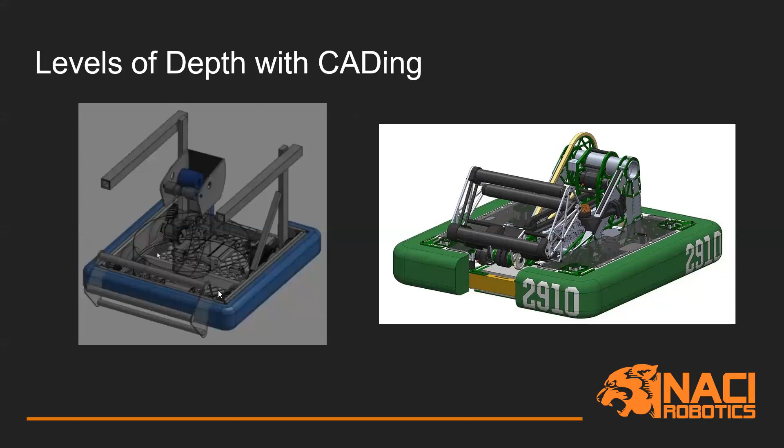I think the three main topics we'll aim to cover today are geometric sketching and Crayola CAD. Crayola CAD, going back quickly, is very similar to this left-hand image, where you place mechanisms to specific areas to get a feel for how the robot is going to be built. Geometric sketching is something every team should be able to do, because with this year's game you're able to take advantage of CADing software without having to do everything in 3D.

We'll also be able to create a new part that we want to design, and then build an assembly from this. So we'll try to get through as much as we can and go from there. Does anyone have any questions so far?

Cool, I guess we'll continue.

So I guess the first step is getting to Onshape. Just Google Onshape and you'll come to this window. One of the biggest benefits to Onshape is it's free for students to get access to all this stuff, so they'll just go through this portal which says create a student account. And if they use their school email address, they'll get a bunch of the features for free.

With mentors, it depends, because I do believe as an educator you will be able to get a lot of these similar perks. How you go about signing up to that, we'll have to see.

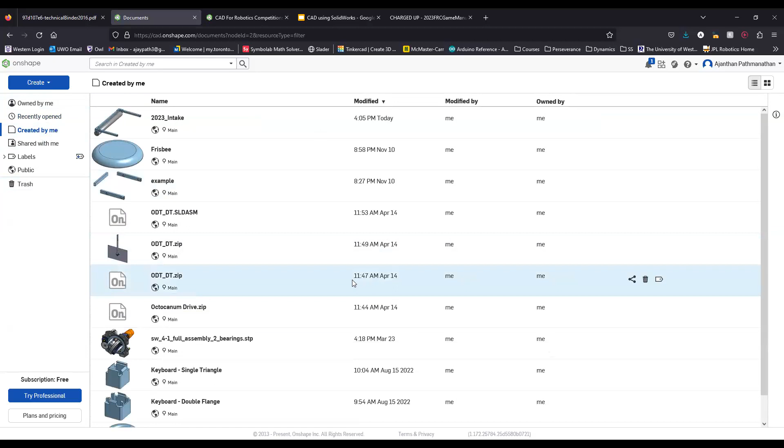We have this dropdown called owned by me, and we can open up recently opened files. We can see all the recent files we've been working on, stuff created by me, meaning the files your team creates yourselves, and then shared with me.

When it comes to building with teams, the shared with me function is really great because it will allow a lot of different students to work through their own projects and collaborate together with these mechanisms. You also have labels, which is a nice ability to organize your stuff.

Going back to this main page, this is just a getting started page. We'll review some resources at the end, but one of the biggest things is this: take a self-paced course. For those of you who really want to get into learning Onshape, this is a really good way to learn the fundamentals we'll be covering today, at your own pace.

I really recommend anyone trying to learn this to go through it. They have a couple of modules that you'll go through.

Another good one is the CAD for robotic competitions course. This is specifically tailored to designing robots in CAD. We can see some of the stuff they're covering: drivetrain, custom components, collaboration for teams, manufacturing, and communicating your design. This is a lot of the stuff you'll be tackling within a first build season.

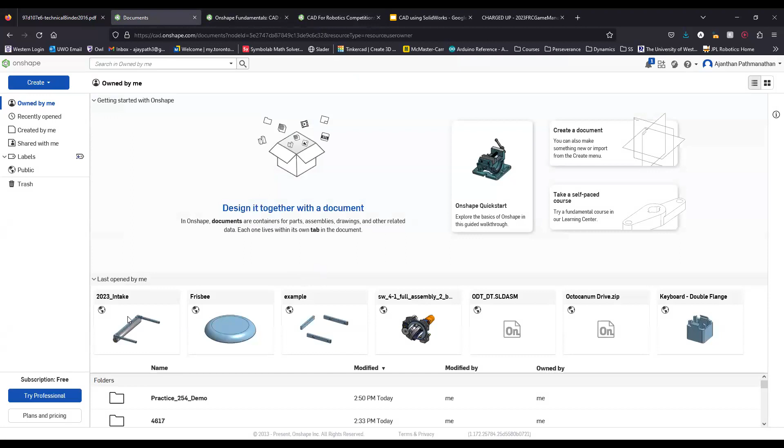Now that we have that covered, lastly, open, similar to your Google Drive, you'll have your latest viewed parts here. Next we have folders, so you can have a folder system for all your parts, which is nice for organizing.

Let's take a look at this practice demo, for example. We see one mechanism, and the way I like to teach is through examples. If we open up this part, a CAD can basically be broken down into two components. This is technically an overall assembly.

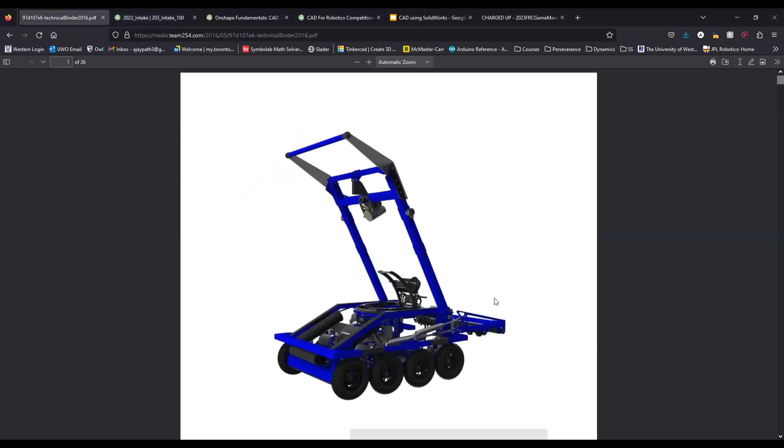This model is modeled after Dropshot, 254's robot from 2016. The goal is to build the intake, so we want to copy their intake and use it as a learning lesson for us to be able to design parts going forward.

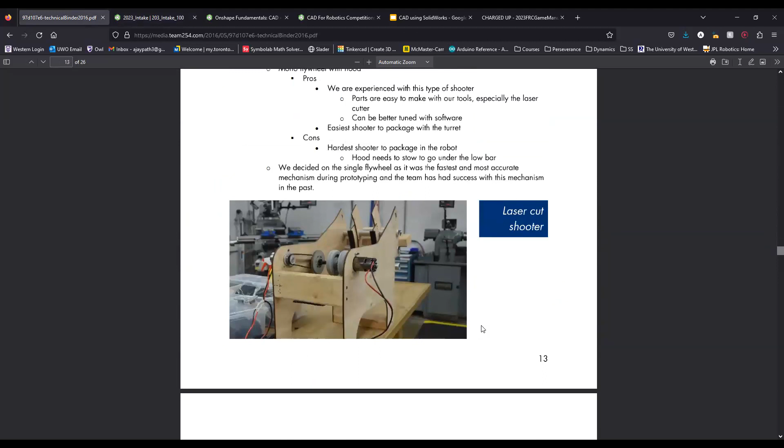It's a very simple mechanism that I think will really teach you a lot of the basics as you go through it. Here we can see the mechanism is essentially three 1x1 pieces of tubing with a roller down here for intaking their ball, since in Stronghold it was a 10-inch compressible ball. They also have this back roller in order to cycle that into their shooter, and a gearbox down here.

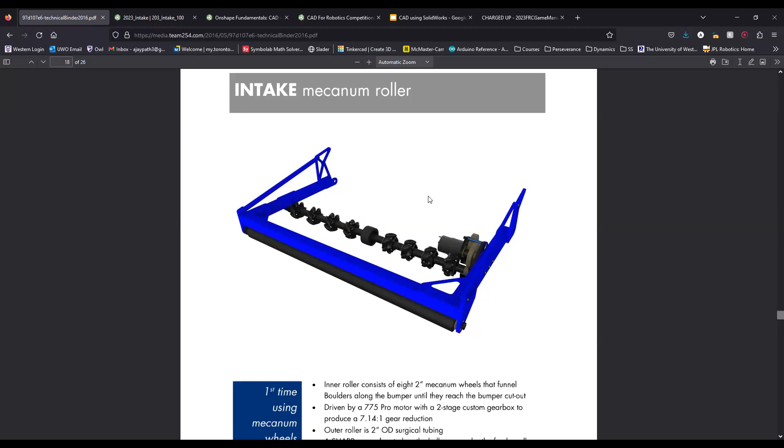For our sake, going back to this mechanism, we won't have enough time to go through all of this stuff, so I think we'll focus mainly on creating this frame piece, these 1x1 pieces of extrusion. We'll create some gussets in order to rivet or connect this all together. We can also create a roller, and I'll show you, if there's time, how to import and get some parts.

So yeah, before we start, are there any questions?

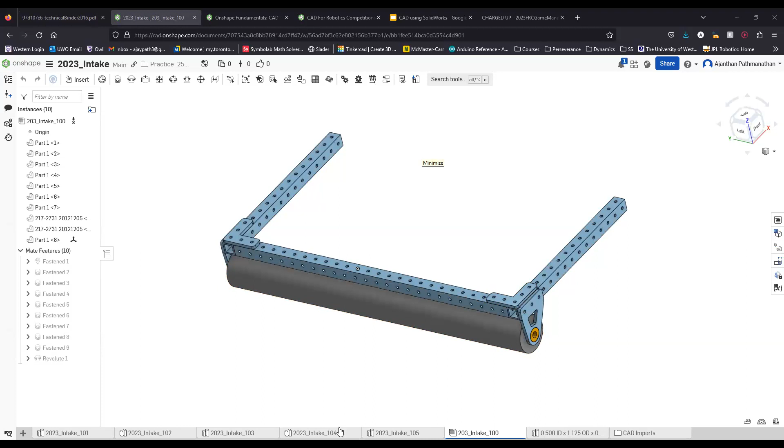So if we go back to Onshape, I'll start from the very beginning. Let's say we wanted to create this brand new. We'll go to open a folder, and then we'll say November 14th demo. So this is essentially a folder that will hold all of the files.

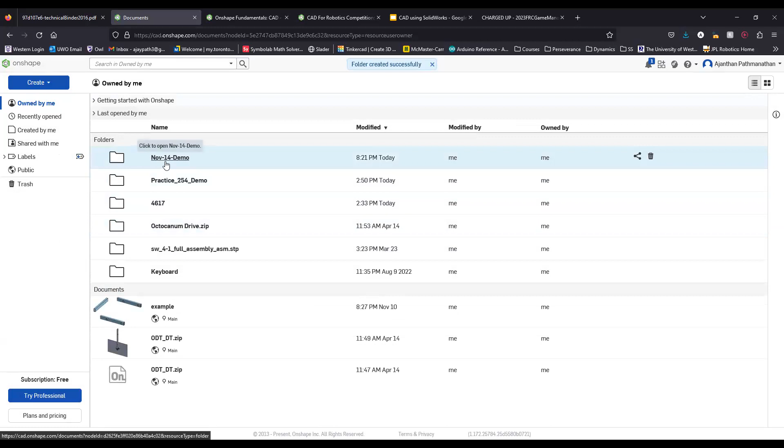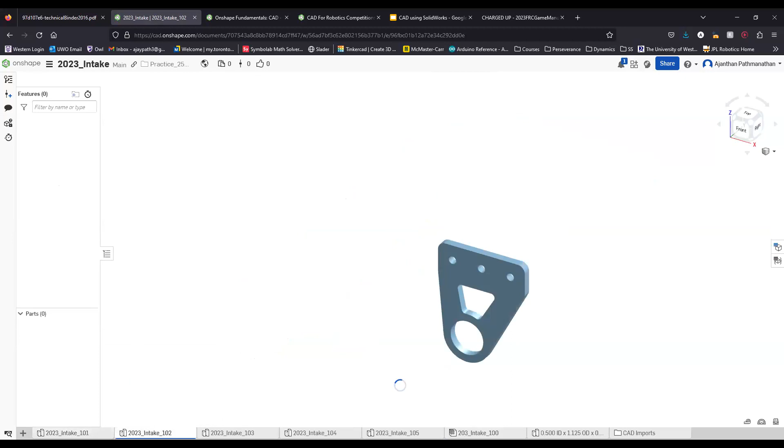The way that you can use Onshape is very particular to your own needs. For example, if we go back to this file, you can see how this mechanism is technically going to be a subassembly. So what I personally like to do is treat this mechanism as your subassembly, and down at the bottom here you should be able to see the various parts that we're going to be building. These are your part windows, and you can see each individual part that we've designed. All together, we can combine these individual parts into an assembly, and that's what this final product will look like. So this you can treat as a subassembly.

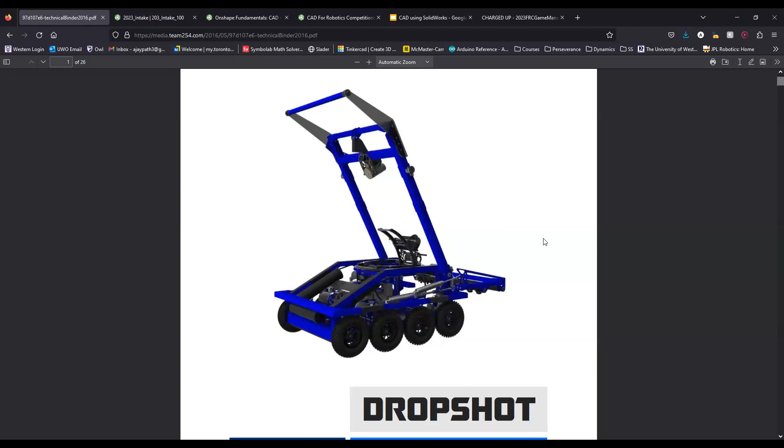Going back to our example, if we scroll up to the overall picture of the robot, one way that would be easy to organize this robot would be: your drivetrain is one subassembly, your intake would be a second subassembly, your climbing mechanism would be a third, and then your shooter would be a fourth. So if you were to break up your robot into that sense, you could have four different subassembly teams. They all collaborate, and you as a mentor would be able to look over all this collaboration and then help the students bring those four components together and design an overall robot using each subsystem.

Okay, so the first thing we'll do is we'll create a new document. And so this will be our intake subassembly.

When it comes to naming conventions, a lot of teams like to do various different things. For us, we mainly like to include the year that we're designing this part, the subassembly it belongs to, and then the part number. That part numbering system, 100 will essentially be the base of it, and then you increase. So 101 will be one channel, 102 will be the length channel, 103 can be a gusset.

So it kind of follows that naming convention, but everyone can do parts differently. At the bottom here, we can see there's a part studio and an assembly tab. We'll essentially be designing individual part studios, and then we can take these parts into our assembly and import them and fix this all together.

So before we start that, let's take a look at geometric sketching, which I mentioned before. As a quick rundown, this may look very daunting to have a lot of these tabs open, and you may be wondering what all of this means. When it comes to designing parts, a lot of this stuff you probably won't use. There are core components, which we'll be covering today, which will very much help you in designing essentially any robot that you wanted to. A lot of this other stuff is essentially stuff that you can learn on your own. So we'll be mainly focusing on the core components.

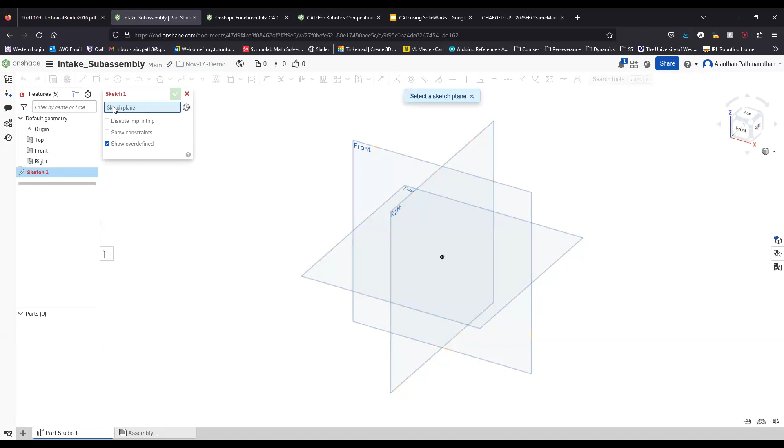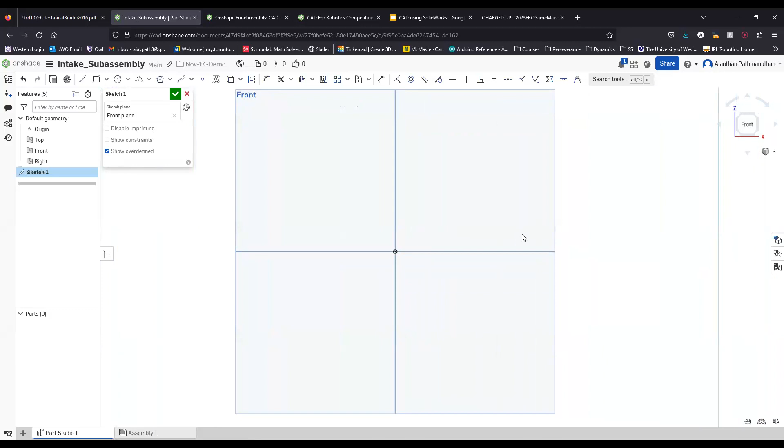It's asking you for your sketch plane, and we're going to design on the front plane. This little cube in the corner will allow you to shift the orientation of the workspace itself. If we go to front, we'll be able to look at the front view. You can also click down the scroll wheel on your mouse and drag the workspace left and right, up and down. Then if you use your right mouse click and hold it down, you'll be able to orient it as well.

So to start with sketching, one thing I'll quickly show you is geometric sketching and the importance of using this first. Let's say, for example, if we look at this year's past game, let's say we wanted to score the cone. So with the cone, let me explain. This is a line tool.

We can use the line tool to, as it says, create lines. With each line, we can click and draw in this workspace and kind of go through and click and drag where this is going to be.

So we have a question: how do you use the wiring custom feature? I was wondering if you could elaborate on that point. Do you mean for electrical stuff, or do you mean a tool in Onshape?

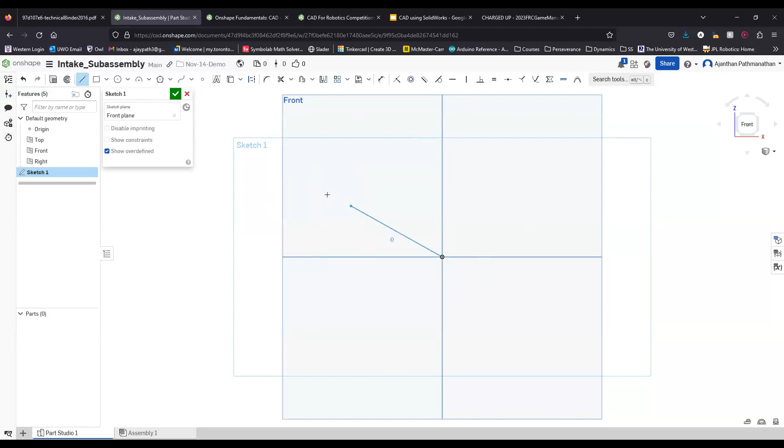As we wait for that response, essentially you can think of this as a drawing board. If you have a line, you can essentially draw this in any space. When we look at the first field for scoring a cone, we can think of the two poles that are sticking out. As you can see, these are blue, meaning you can shift it around and extend it. Basically, this means it's not defined.

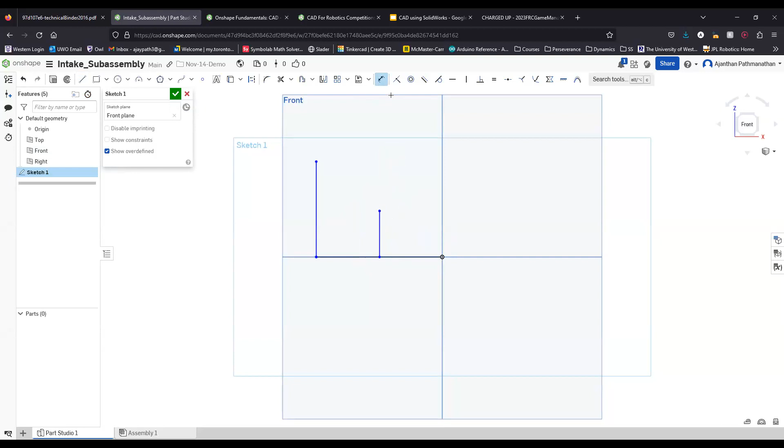In order to define things, we need dimensions. If we go up here, we can see the dimensions tool, it looks like a ruler. By clicking the dimensions, we can click on the line itself, and then we can get a distance, and this is in inches. We can assign a distance that this line will elongate to.

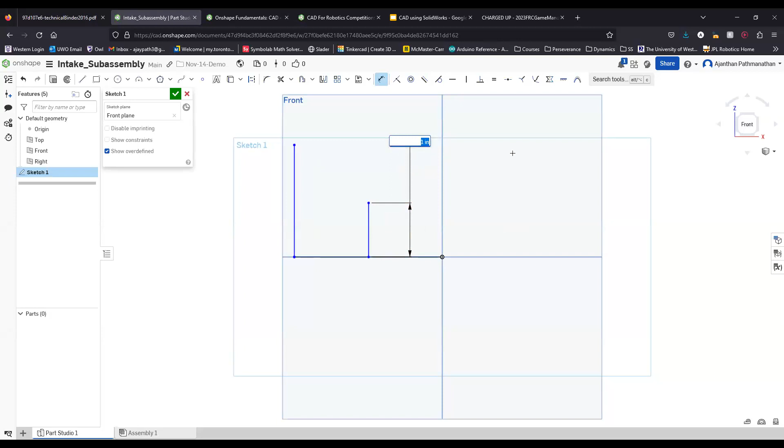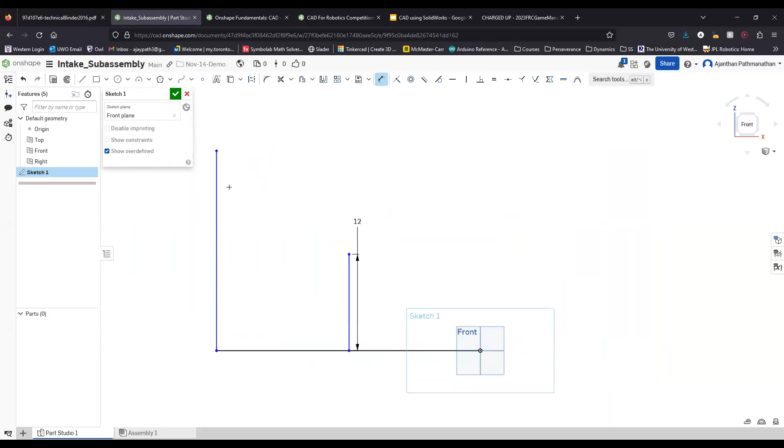So right now I can say it's a 1-inch line, and it will edit there. Then I can come back and double click in and adjust that to a 3-inch line, and it kind of adjusts its reference. In terms of the first field, I believe roughly this was 1 foot, and your larger pole was 2 feet. So now we can assign lengths to each line.

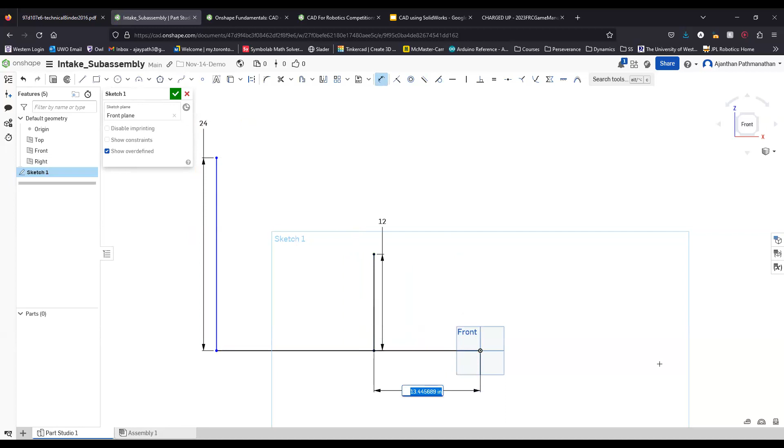But now the question is, how do we define this distance? We can go back in and click our dimension tool. From the origin, we can distance to this line, and then we can edit our distance here. Let's say it is 24 and 40.

So now that our sketch is black, it means that it's fully defined. If I click any piece, I won't be able to move it because it's fully defined and constrained. This is essentially a sketch of the field. Hopefully you guys can visualize the poles that are standing there. When it comes to geometric sketching, it really helps us understand the capabilities of a robot.

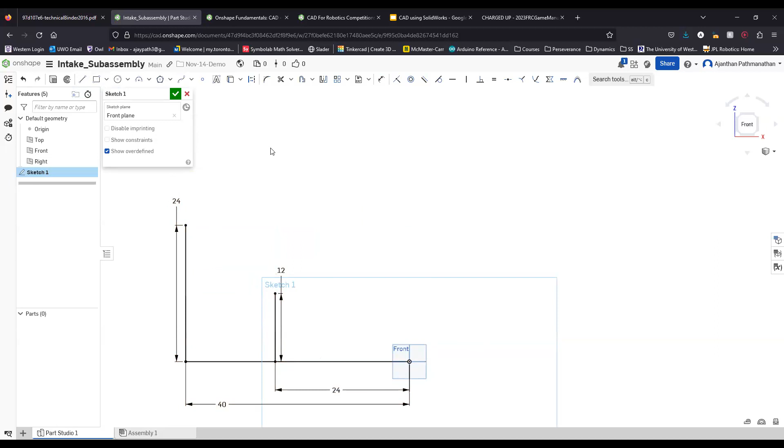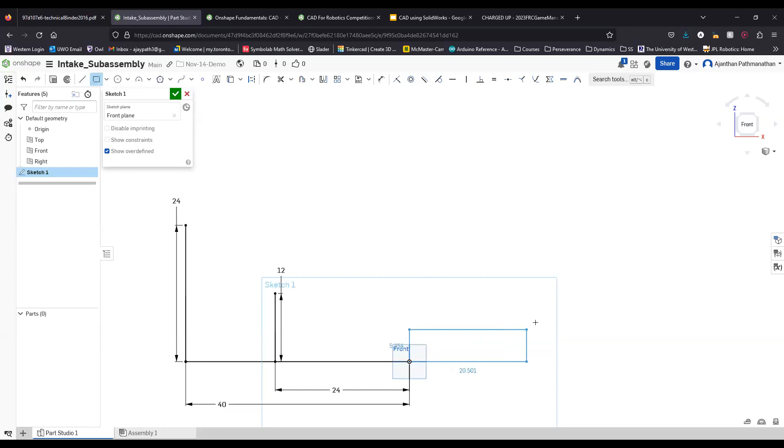To cover this very quickly, if we use this corner rectangle feature, and click that little arrow, we can get different types of rectangles. For our need, we're going to use a corner rectangle, which means we click on a point for the corner, and drag out to essentially any point in space. If we dimension this to be 32 inches in length by roughly 6 inches in height, this is a rough estimate of the kitbot frame.

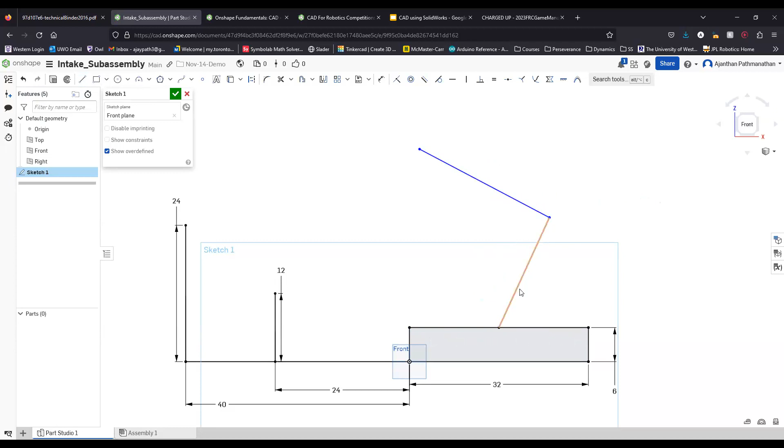Let's say we wanted to make a double jointed arm and place it in the center of our robot. If we see this line here, this little square pops up, and we can drag a line from there to indicate that it's the midpoint. So we can have one arm here and one arm like this. This can essentially act as your arm, a double jointed arm, say you were trying to place a cone onto this back layer.

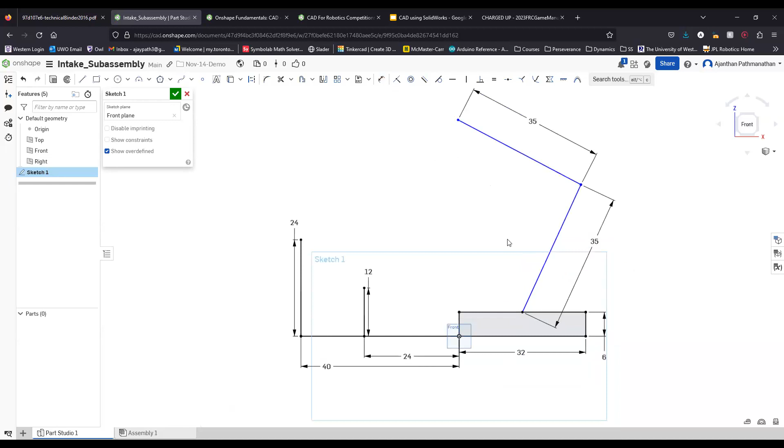So we can quickly dimension that line, and let's say we wanted to make it 35 inches, and then we also wanted to make this one 35 inches. The biggest benefit of being able to do this is you can quickly see if these measurements will be able to reach the point that you're trying to achieve.

This is a really handy skill when you're designing mechanisms at an initial phase. If I wanted to design something like an intake, I'd be able to quickly model the game piece on the ground, compare it to our drivetrain's dimensions, and then see the length of the intake I'm going to need, where to place the rollers, and what type of sweep the intake will have when it goes from its resting position to its down position.

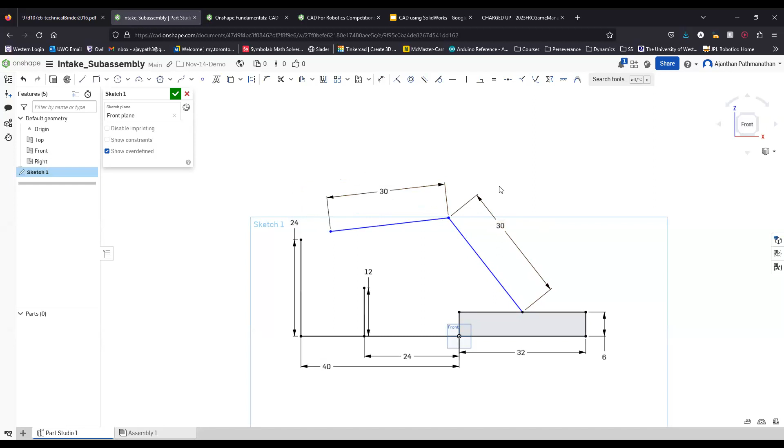As you can see, we can change these different measurements. Let's say we wanted to make this arm as small as possible. If we constrain these to be 30 by 30, we can see will this be able to reach? And we can see it kind of is able to reach when it's fully extended.

One of the things we can do is delete this constraint and move this piece closer. I want to click on this little corner piece, and we want to click this line. Up here we have different constraints, and constraints are really helpful when it comes to sketching because you can assign things like two parts being coincident to each other.

If you have two circles, they can be within each other, which is concentric. You can have two parts that are parallel, tangent, vertical, horizontal. So when we design parts, we'll see this a lot more.

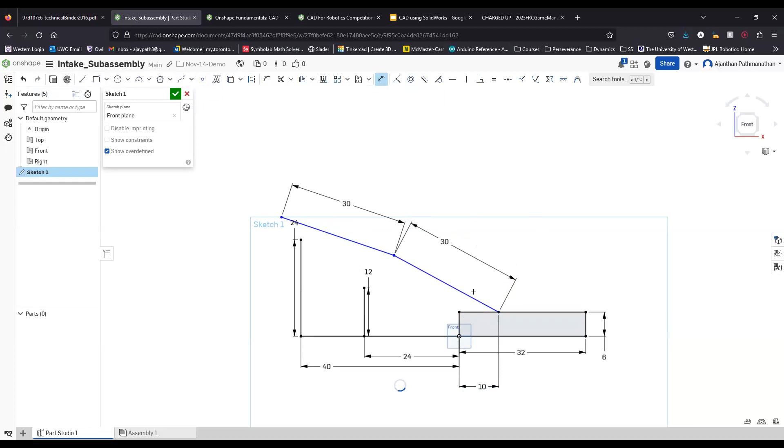For now, we just want to make these two coincident. Then we want to take our dimensioning tool again, and we can dimension it, let's say 10 inches from the front of the robot. Now we can see that it's able to reach.

So this is essentially just a quick overview of geometric sketching. It's a really handy tool that allows you, without having to design every single detail of every single part, to see if your logic will be able to achieve these things. Instead of having to build an entire mechanism and then realize the length was too short and you weren't able to reach your goal, this is a really quick check you can do to make sure everything works properly.

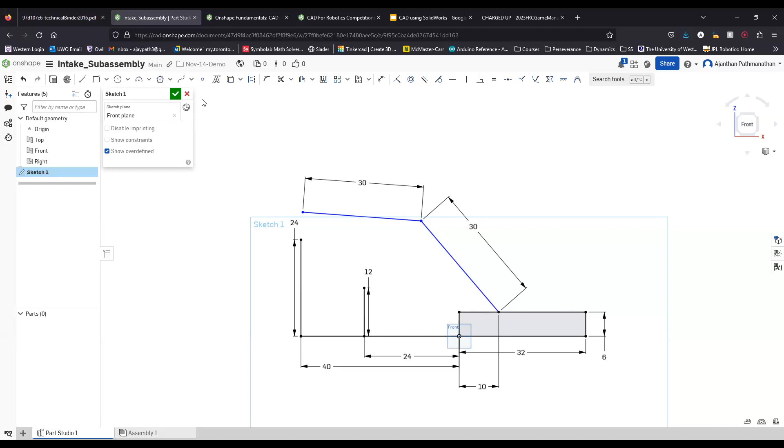So if no one has any questions regarding this part, then we can create our first part. Let's go back, and I'll just open it in a new tab so we can cross-reference this with the part that we want to design.

The first part that we want to design is the center piece of tubing. With this piece of tubing, we'll be able to design this from scratch and then use this as a 1x1 piece of tube.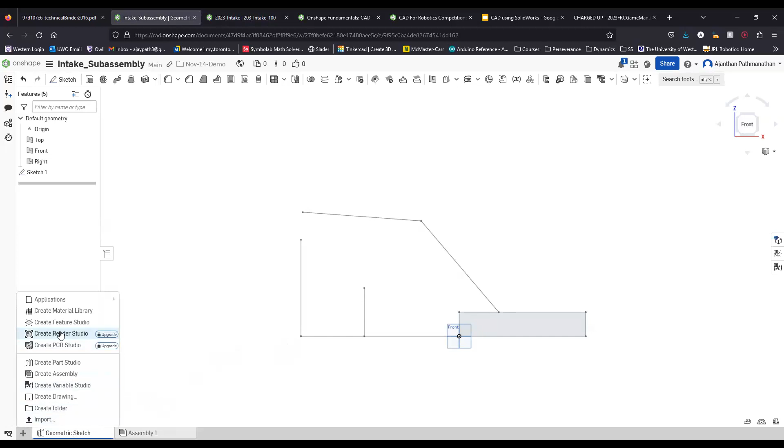If we look down here, we can click on our part studio and then click rename, and we can call this our geometric sketch. From there we can insert a new tab and create a new part studio. This is essentially creating a new part for this subassembly.

Of similar nature, we can click sketch and choose our front plane, then orientate ourselves in order to be on that front plane. Up here we can see our drawing tools, as I like to call this section. You can draw lines, corner line rectangles and squares, circles, arcs, polygons of different sides, and then you can have some text if you wanted to.

So this is a lot of your drawing tools when it comes to designing. Then you have what I like to call features, the main ones being changing lines from a solid line to a construction line. A construction line is just a line you're using for reference, and it doesn't really have any effect on the part. You can have fillets to kind of round edges.

I think someone has a question.

Yeah, it's Peter. Just wondering, I've noticed on some sites like AndyMark and things like that, they actually have CAD files of the part, like if it's a 1x1 piece of aluminum. Can we just bring that in, or do we have to actually draw it physically, like what we're doing right now?

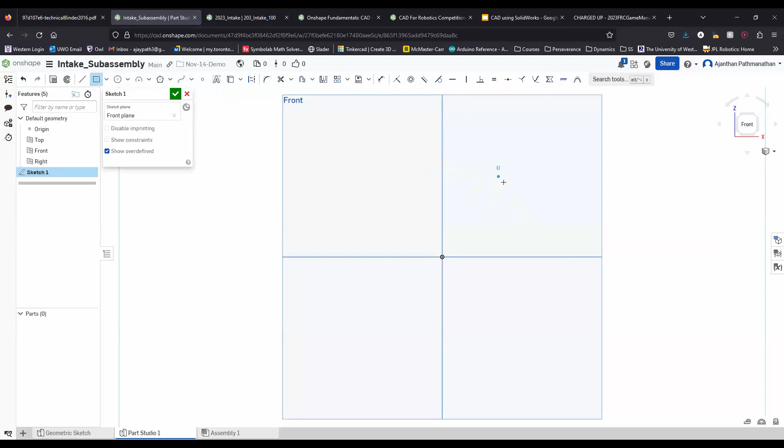Okay, so let's just assume we wanted to design a piece of 1x1 tubing. The first thing we need is a rectangle, so we click this dropdown and select a center point rectangle. If I draw this rectangle, I can draw it anywhere in space, but what if I want to put it at the origin? First I click on the center here, then the origin, then click the coincident constraint, and this will bring the two together.

Next we need to define the length and the width. For a 1x1 piece of tubing, both are 1, so we create a dimension and specify 1 inch. One thing I teach my students a lot is to use as many relations as you can, because relations are much easier to change later than dimensions, since you'll have less to change. For example, if I wanted to dimension the length of this other line, I could also set it to 1. This is one way to get a 1x1 square on your sketch.

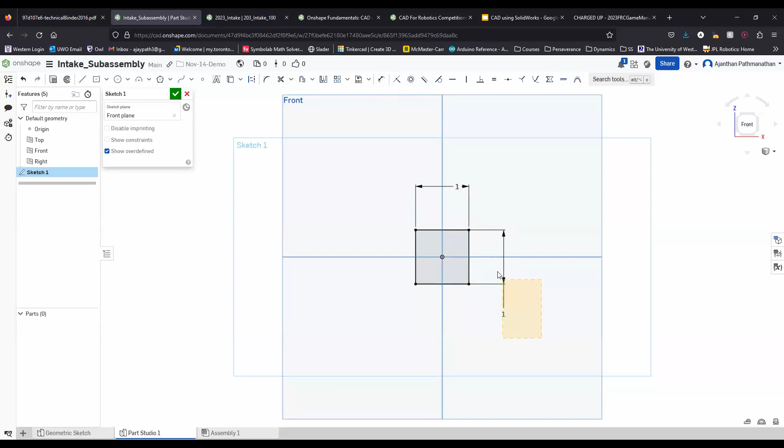The problem is if I wanted to change this to 2 inches, I would also need to come back in and edit this one separately. So instead, what we can do is click this top line and the side line, and find our equal constraint, which as it says in the dropdown, makes them equal length.

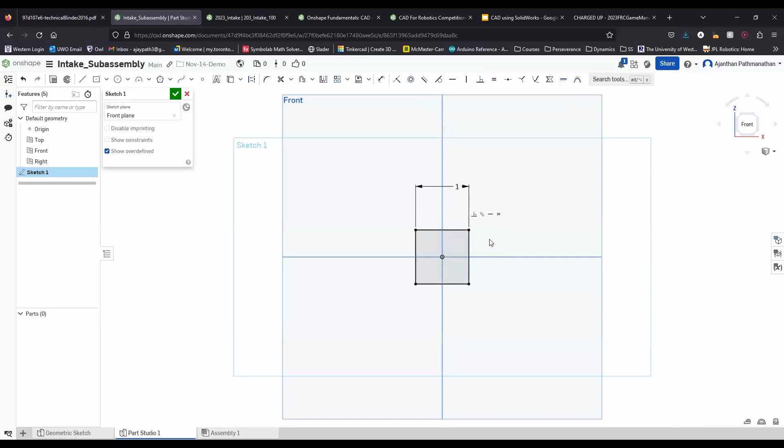Now we can see that's all black and it's fully defined. If I change this to a 2-inch square, then it all moves together. Depending on the purpose, we find that using constraints is a lot easier. I recommend people to play around with them and find out what they like to use as a team.

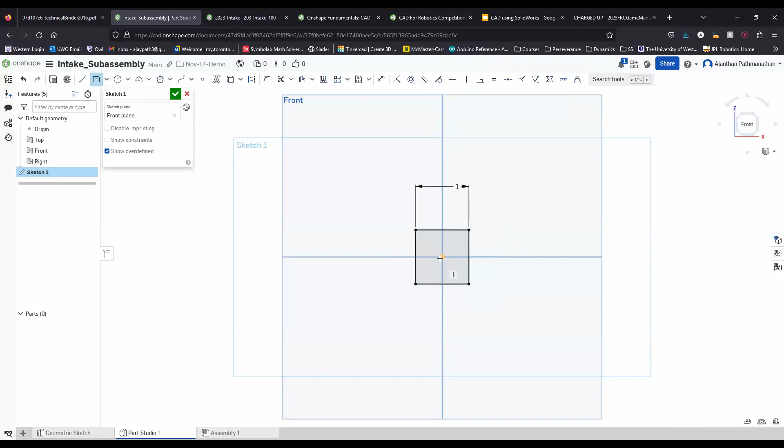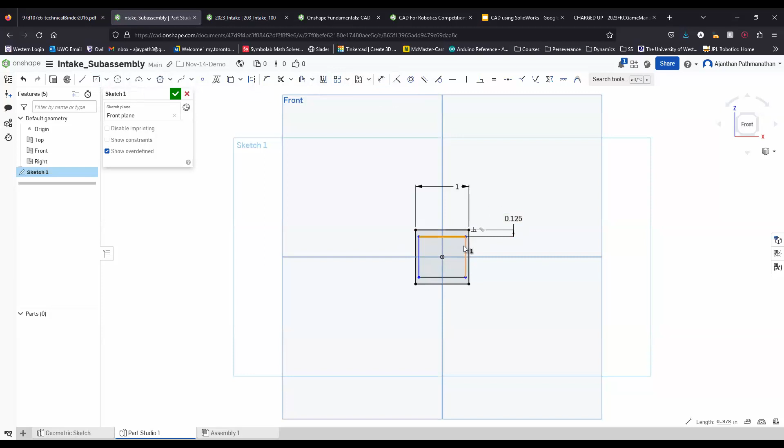So to make our tubing, if I click on the center, we'll draw on the origin as well. This measures the outside 1x1 piece, and then we want to make our inner thickness. If we go back in dimension, we can dimension between these two lines, and let's assume that our thickness is 1/8. Now all that's left is if we click our top and our side line again, we can make them equal, and then we can have our 1/8 piece of tubing.

So now we have a 2D flat sketch, but we want to be able to translate this into 3D space, and that's where these two functions come in: your extrude and your revolve. Extrude is what you're going to be using majority of the time, and your revolve is when you're creating more circular parts, something like a pulley or a gear or a frisbee. Circular objects are more for revolve, and extrude is basically where you're going to add material or take away material.

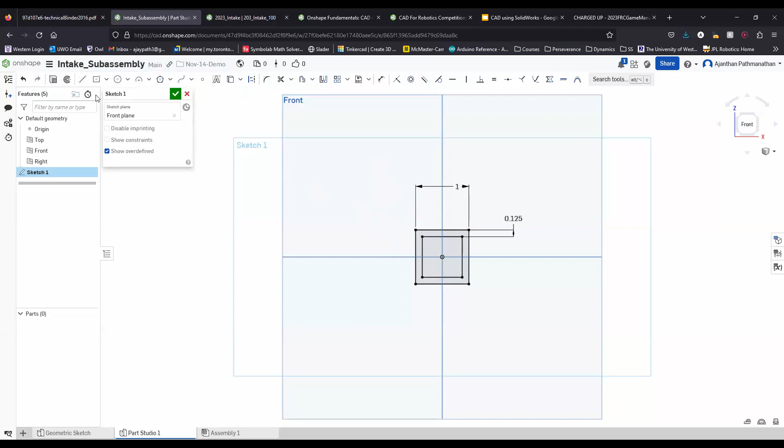So to our sketch, let's say we want to make a super wide intake that spans our entire front base of the drivetrain, which is 26 inches. We want to extrude this sketch out to 26 inches. So all we need to do now is click the extrude button.

It's going to auto select this face. That's what's in this section here. We can delete this as well, and we can highlight this. Then we can click on this if we wanted to select something else, and you're going to have different options here.

What we want to do is use blind, and then we can specify the depth, which is how long we essentially want this piece. Like we said, we want this to be 26, so we can specify that to be 26 inches.

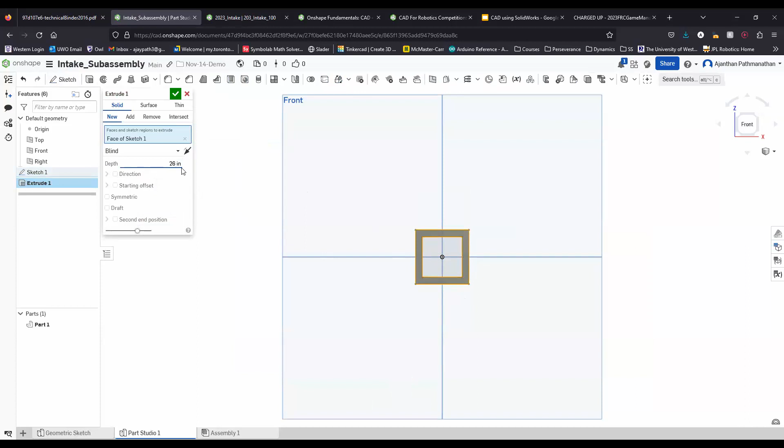If I change my view, yep, we can see how it's a lot longer now. If I play around with this length, you can see this is just a preview of what this part is going to be. This direction tab will also flip the direction if we want to, but for our sake, we'll mainly be using it as it is.

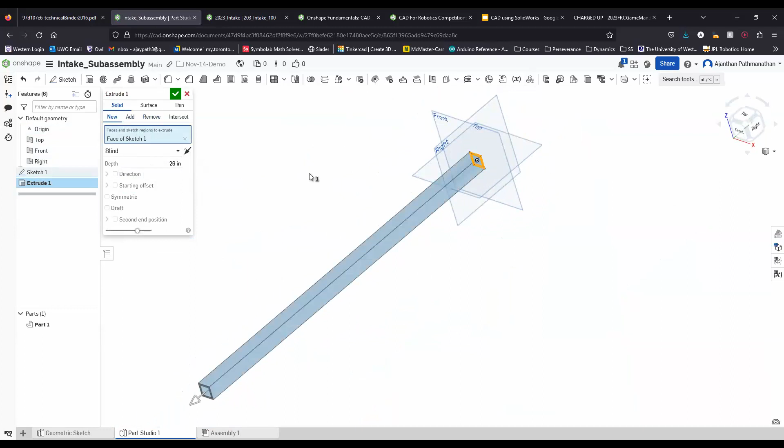We have an add function, which is adding more material to this, and we have remove, which is also removing parts. We'll see that in a little bit of how we're going to use this. So what we want is a new solid, and we want to have it of 26 inches in depth. Now we can see that our sketch has turned into a 3D piece of tubing.

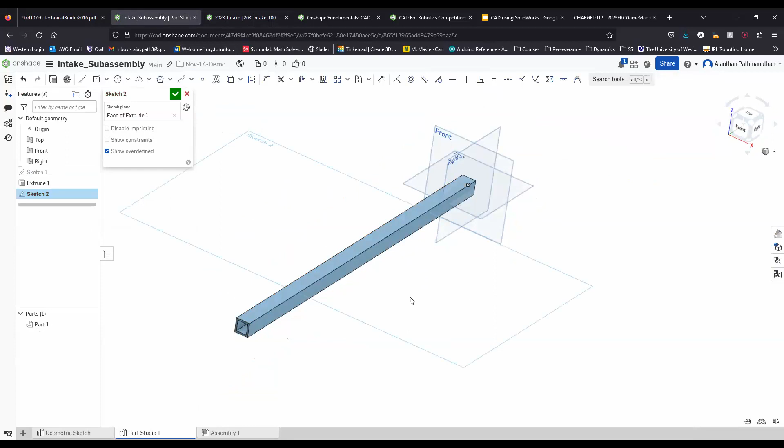Our next step is to get this holing in order to match our gussets. What we're going to do is sketch onto this top surface. We can orientate, and we have our line. This line is going to represent the center between our two halves, and we want essentially an equal hole pattern going throughout the middle.

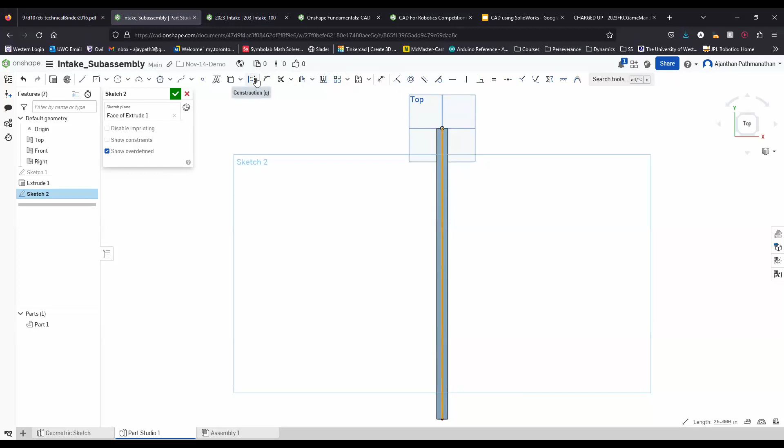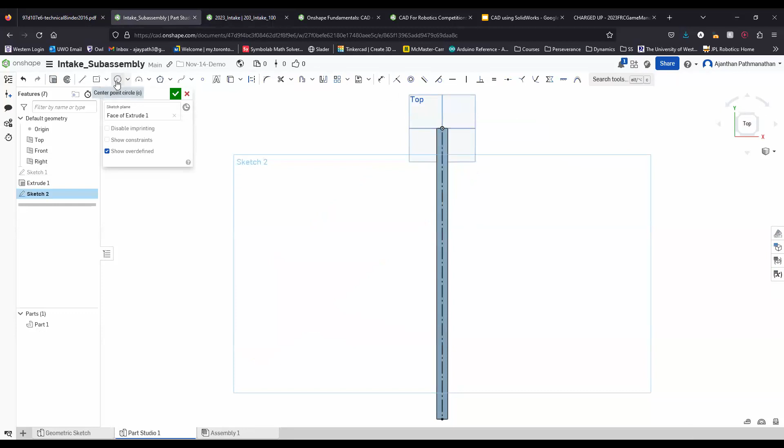So what we can do is create a circle, click it onto the line, and then drag out. This will allow us to create a circle on our sketch. Similarly, going to the dimension tool, we can click the circle and specify the diameter of the circle. So 0.25, if we zoom in, will give us a 1/4 inch circle.

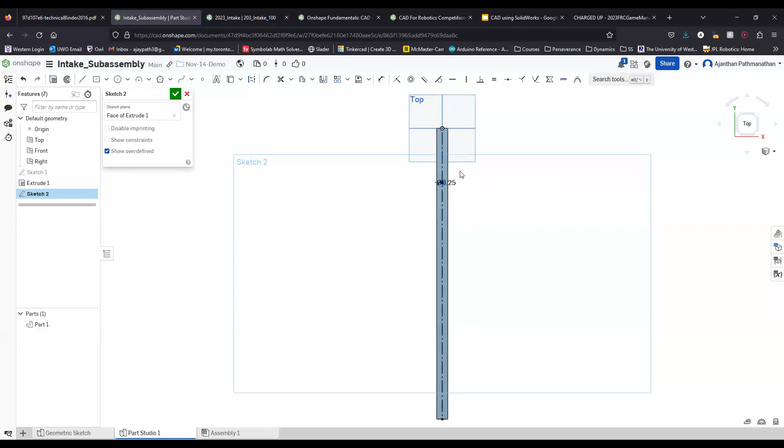Next, in order to fully constrain this, because right now if we drag this, it can move anywhere on this plane, we want to be able to set a distance for it. So if we click dimension again, from the top, we can specify 0.5.

And so this is 0.5 from the edge. The question is, if you wanted to have an entire hole pattern, what's an easy way to do it? When it comes to sketching, we have this thing called a linear pattern, which essentially repeats a certain thing over a linear period.

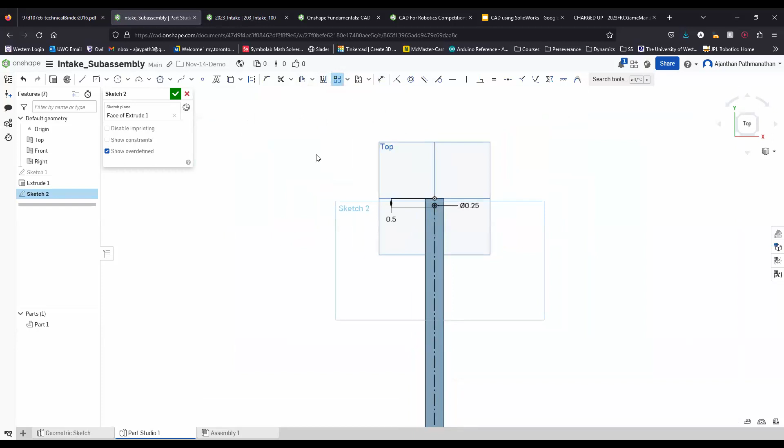You can also do this in a circular pattern as well. To quickly demonstrate this, we've selected our linear pattern, and let's say we want to select our circle. This view pops up where we're able to identify which axis we want and how many. So in our, let's consider this the x-axis, we actually only want one of them, and in our y-axis, we should be able to fit 26.

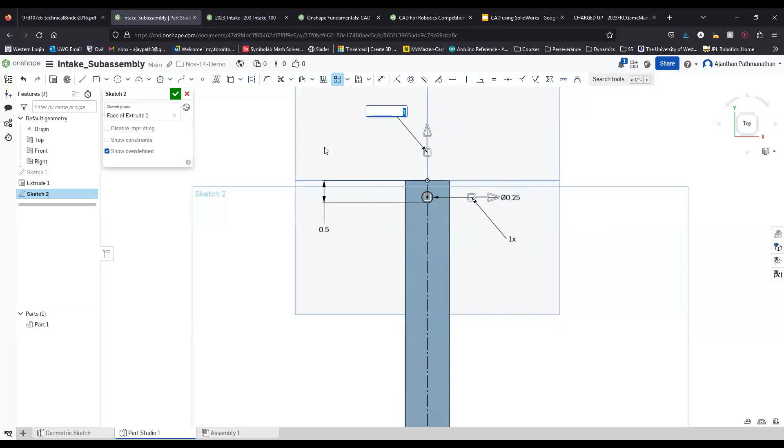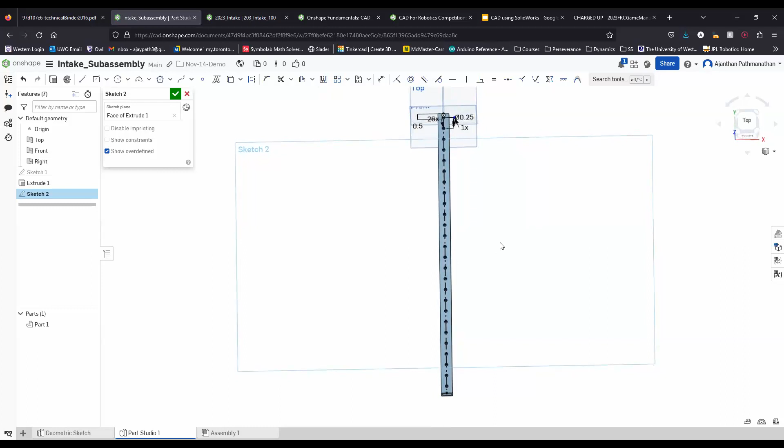And then if we flip this, we can now have 26 holes, which may be hard to see right now. So we can right click, and then we can see all the holes that we have. Now we can easily just cut out all of these holes without having to draw each individual hole. So we have 26 holes that are spaced out 1 inch apart.

And so we can easily change this to, if I only wanted 5 holes instead, we can see that we can easily edit that number.

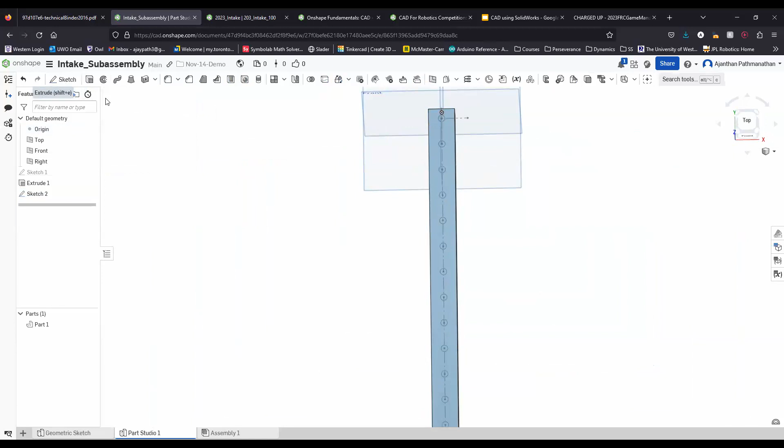And so now we want to go back to our extrude tool, and it's going to select this sketch that we were just working on. But instead of add this time, we want to click remove. We can choose a depth for how much we want to remove, but in our case we want to go down to through all, which will cut through the entire plane. So if we click OK and go back to view our part...

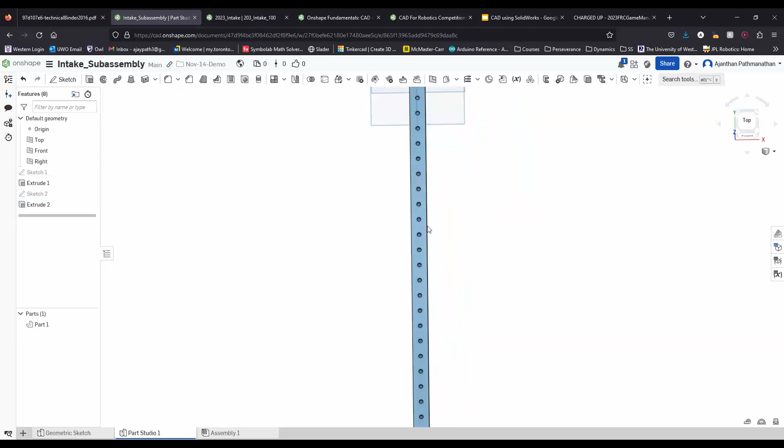We can see that the holes have been cut throughout. That's kind of how we can make use of cutting out material. So hopefully that part demonstrates some of the basic functionality when it comes to designing parts.

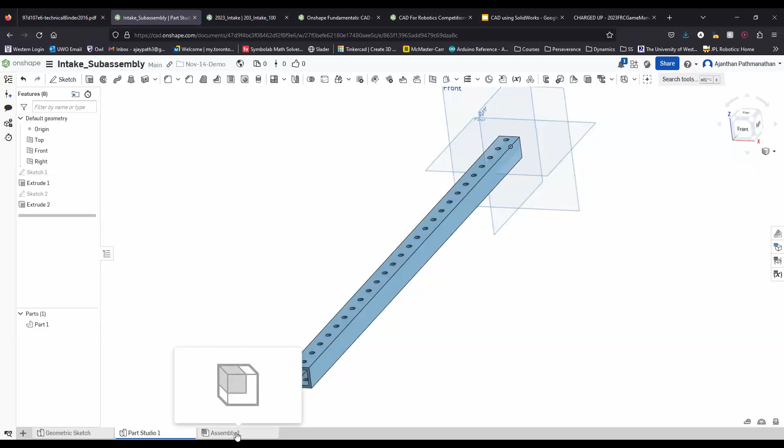And so quickly what we can do is I will show you how to import a part really quickly, and then an assembly as well. So if we open up our assembly tab, it's very different in terms of we have an insert function that allows us to insert different parts. And then we have a mate connector, and various mates that we can apply to our parts in order to constrain them.

So some being more specific, for example, a screw relation. We can have that screw mate within parts, or we can just have simple revolute mates, so circular object within circular object, or just two parts that are against each other.

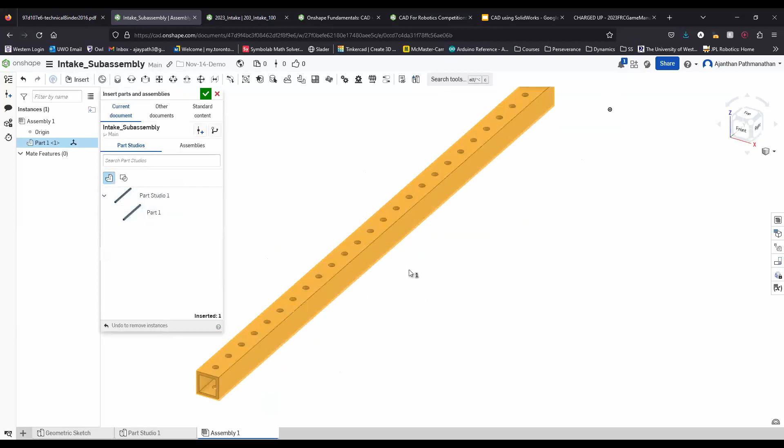So if we insert in our part studio, we want part 1. Click this and click OK. So this here is our origin, and the first thing is we want to connect with our origin.

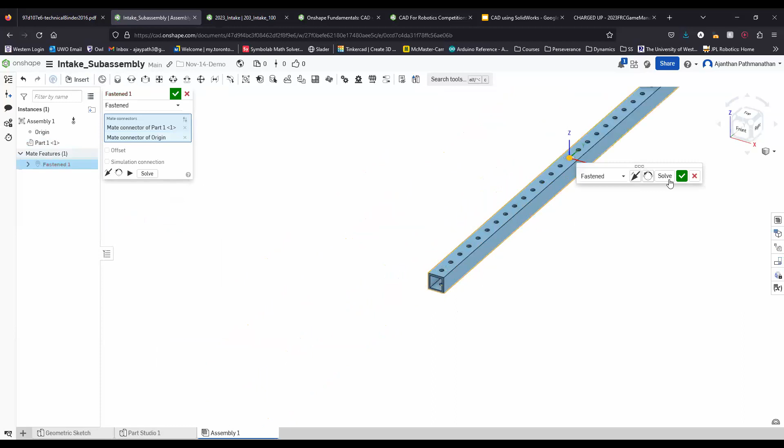So if we click the fasten mate, and if we find, so this will be the center of our tubing, we can click this, then we can click the origin on here. And so now if we try to drag this around, it does not move.

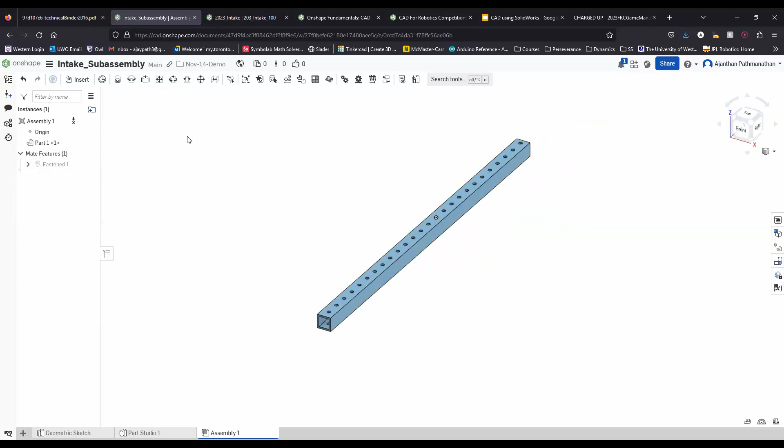And so now this is fixed at our origin. It's always good to have your first part fixed at the origin so that everything else will be able to build from that origin, which is handy for stuff later down the line when it comes to getting calculations.

And so we can insert another part as such, and we can click the fasten mate again. So let's say I want to mate this top face of this 1x1 piece of tubing to the bottom of this.

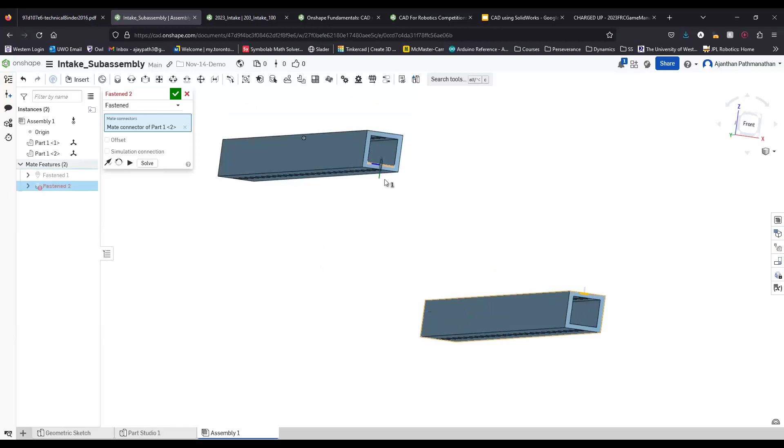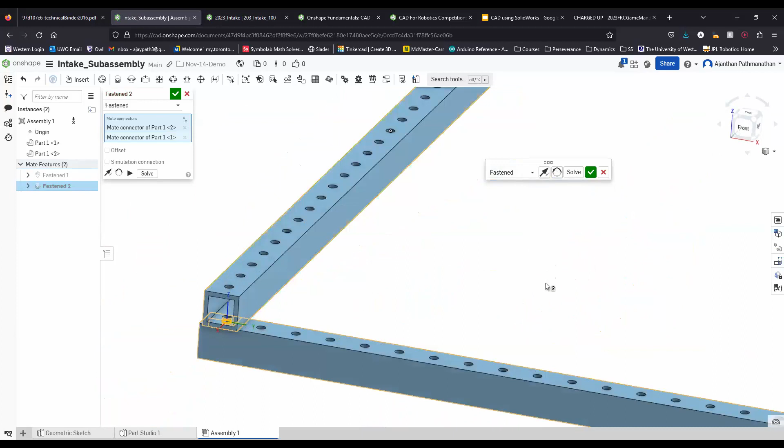So I've selected the top hole here. Now I need to orientate this so I can select the bottom hole here. And so as we can see here, they've become mated together in a sense where they are now touching. So I can reorient the secondary axis, spin this around however I like. So for our case, let's say something like this.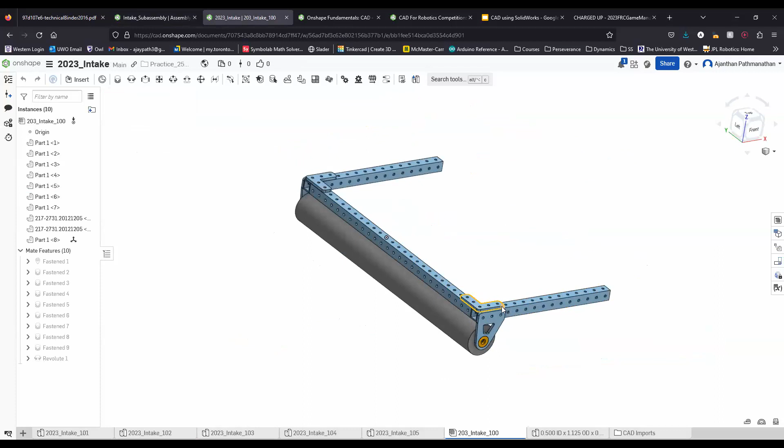And so this is how we can mate two parts together. So when you imagine something like your intake, you'll be able to mate all these parts together, and then mate the gussets on top, and create this structure in the end.

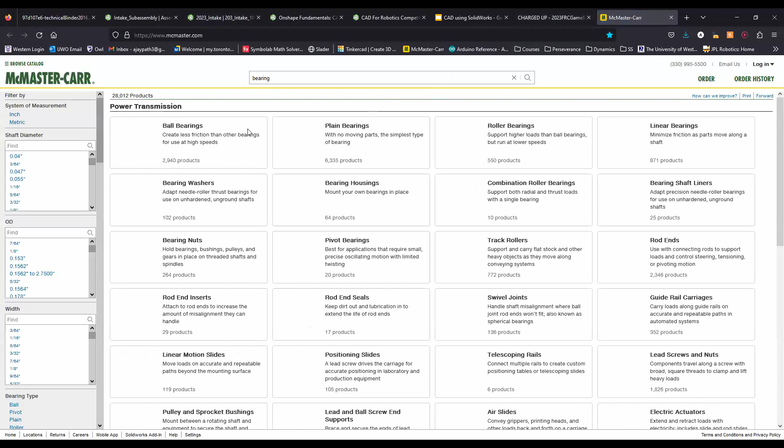Going back to here, let's insert a new part. If we go to something like McMaster-Carr and search up a bearing, let's just grab any ball bearing we can find. Let's say we want this top one. We can click on this part number, and down here they have a 3D SolidWorks model, which you can download as a step file.

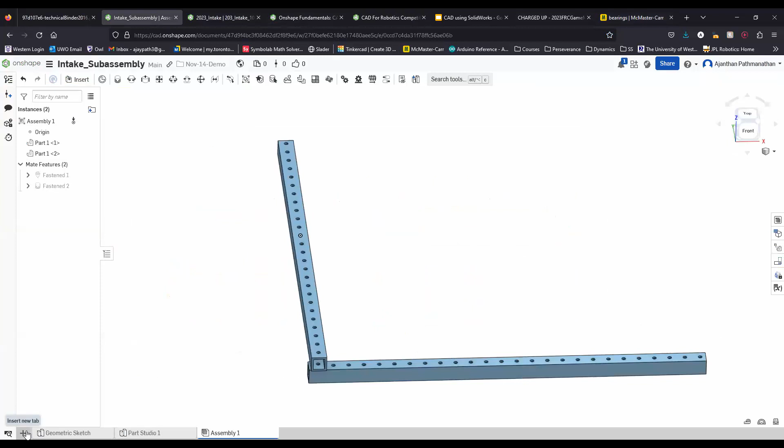So we can go back to our insert menu and click import. In my example, I've already downloaded a flanged bearing from the McMaster-Carr website. By clicking this and opening it, it asks if I want to import this document, and I do want to import it. It's successfully imported.

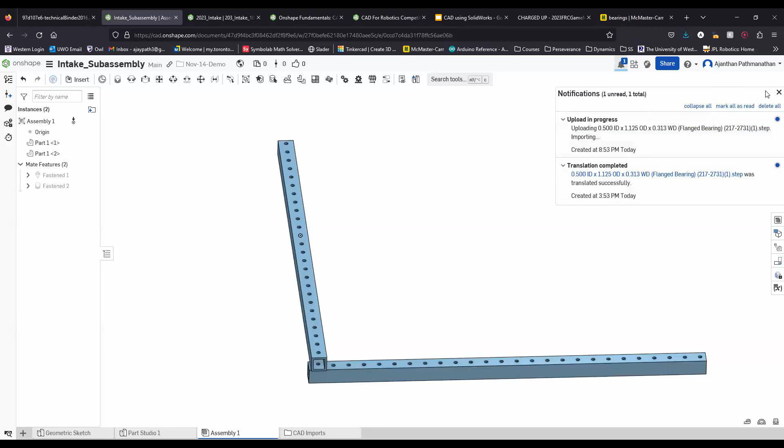So now if we look down at our part studio, we can see that we have a new part, which is the bearing. So like we were saying before, you don't need to entirely design every single part—you can simply import the parts you need and mate them together.

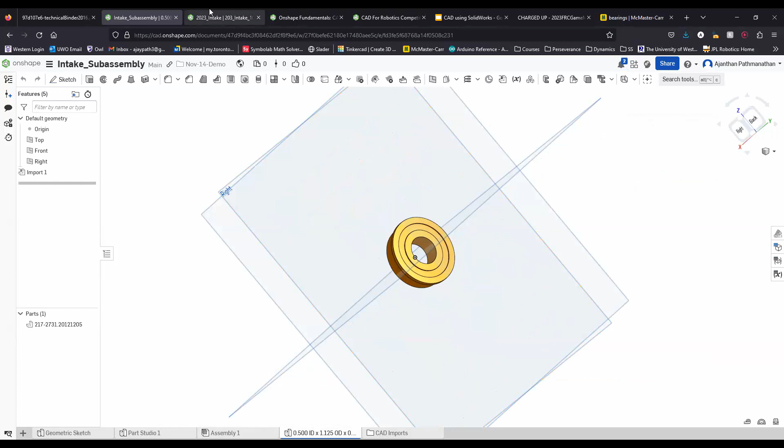So let's go back to this example, and let's say we wanted to make a new assembly. So we create an assembly. Since this has all the parts in it already, we can take this gusset, for example, and let's say we want to mate these two parts together.

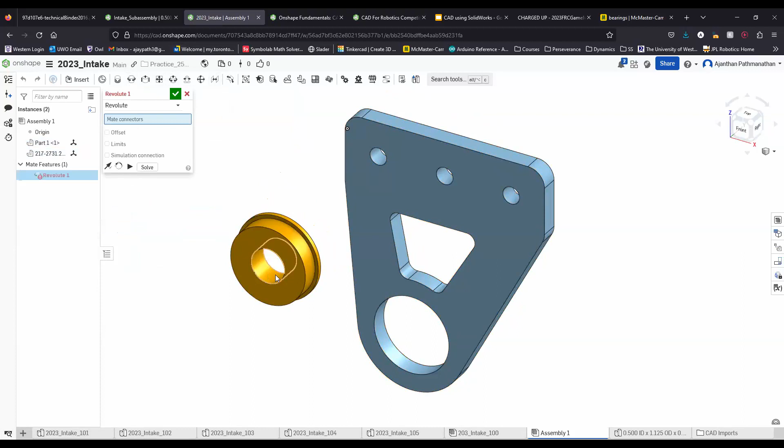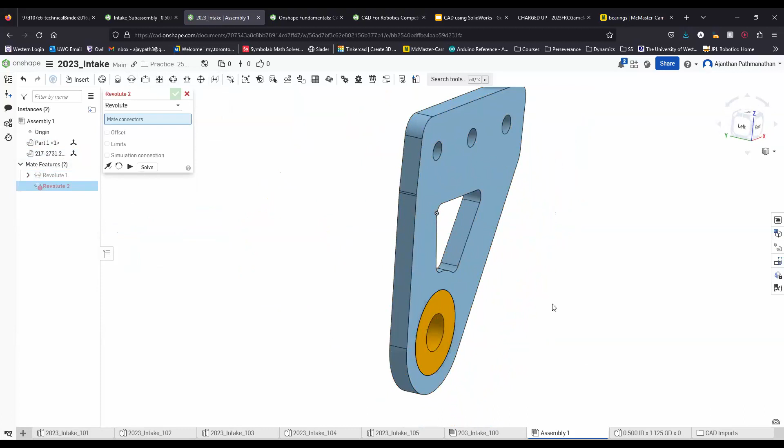We can choose a revolute joint instead, in order to grab the back of this piece and then mate it to the back of this piece as well. And so there we go. This revolute joint is much easier when it comes to mounting circular objects together, like you saw there. So now we can quickly insert this roller.

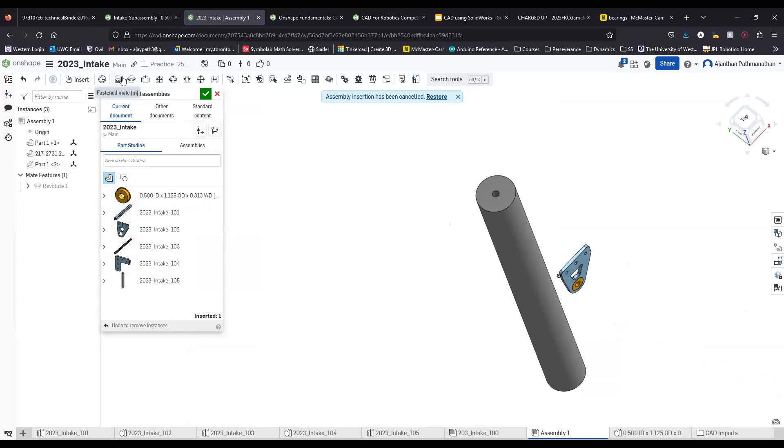Insert and open up our roller. We can quickly make a revolute joint between here and then this face here. And then we can flip the direction and click OK.

Hopefully you can see kind of how we ended up getting to this intake by essentially designing all these pieces of tubing. We can then design gussets in a similar manner, where essentially we sketch—so something like this L, we would just design an L shape, and then make this all together.

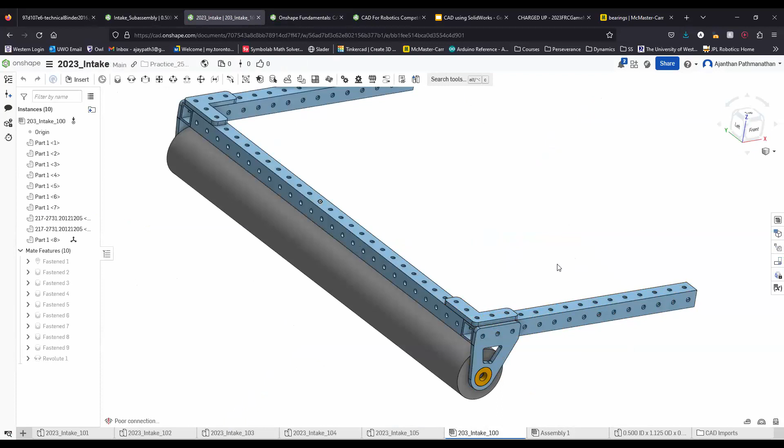I do recommend taking your time and going through the Onshape CAD fundamentals, and then also the First Robotics stuff. These two will really capture a lot of the basic foundational stuff that you and your team will need for building during the build season.